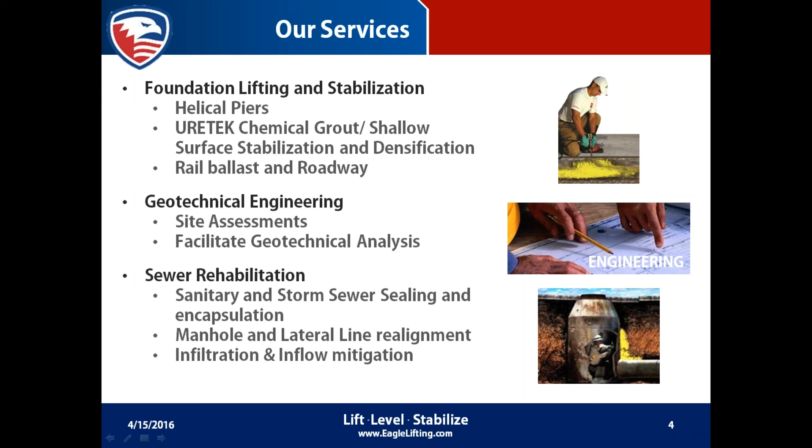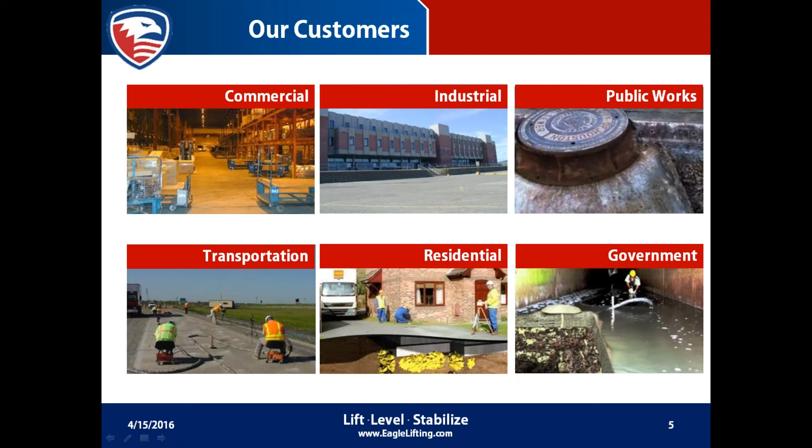The clientele that Eaglelift works with spans various industries, from commercial clients, industrial clients, schools, warehouses, distribution facilities, public works departments, which we'll be focusing on today for our infrastructure, manholes, roadways, highways, transportation, residential clients, and government clients as well. So we have a wide variety of clients.

A little bit about what we're going to talk about is the URETEK deep injection process and the URETEK method. This is a form of compaction grouting that utilizes a structural polyurethane, and what this is used for is specifically what we're talking about here with infrastructure management.

When you have a leaking culvert or a failing manhole or something that's creating roadways and highways to begin settling, which could be from rainwater, cracks in the asphalt, a rise in excavation costs over the past several years has made it almost impractical to both R&R or just pave over. You put a Band-Aid on a broken arm, it's going to fail pretty quickly. So the real repair would be to completely demo everything out and then install brand new concrete or asphalt, especially when you're talking about manholes and culverts.

Now we're not just talking about digging out a section of road. We're talking about digging, excavation, trenching, shoring, pulling all of those spoils out, fixing the problem, which could be the manhole or the culverts, and then importing dirt back in or using an engineered fill, densifying everything, laying new ones. So a lot of downtime. And as time moves on, all of the excavation costs and costs for disposing of spoils are continuing to increase. So what we look at is methodologies to buy more life out of our aged infrastructure.

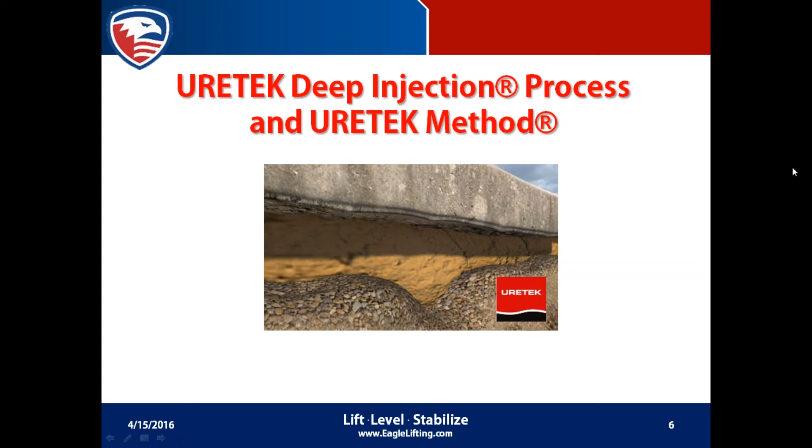Most people are familiar with mud jacking or pressure grouting, which has been around for 80-plus years. Structural polyurethane is sort of the next big thing, the next technological advancement moving forward in the field of compaction grouting.

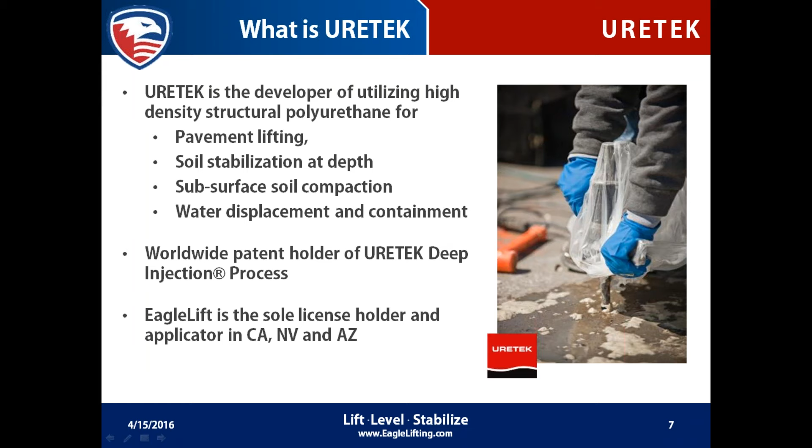So what is URETEK? I said URETEK deep injection and URETEK method. URETEK is a company name. They are the developer of utilizing high-density structural polyurethane for pavement lifting, soil stabilization at depth, subsurface soil compaction, and water displacement and containment. All of these processes utilize the same proprietary multi-component chemical resin, or structural polyurethane. They're a worldwide patent holder of the URETEK deep injection process, which is done for deep soil stabilization and densification. Eaglelift happens to be the sole license holder and applicator in California, Nevada, and Arizona, which is why Eaglelift is often represented as the URETEK Southwest dealer.

The URETEK polymers, or polyurethane, allow for flexible use for lifting, sealing, void filling, and soil compaction operations. Once injected, the polymers expand up to 20 times the initial liquid volume, which means they're injected under very low pressure. If they're being injected at depth through a pipe, oftentimes it's just enough pressure to push the liquid of the isocyanate in the resin through the tubes and into the soil.

As a liquid, it is introduced into the soil and then permeates through the soil or densifies down into the soil, and then the chemical reaction occurs, which expands the polyurethane. Depending on the type of soil, it will either bind the soil together to create a very solid substance, or it will push against the soil, which gives us the densification we're looking for.

The more sandy or silty a soil is, the more polymer it'll take to achieve the goal. However, the more sandy it is, the more it binds the soil together. When you start getting into clays, dense or medium dense clays and so on, that's where it starts pushing against the soil and displacing it.

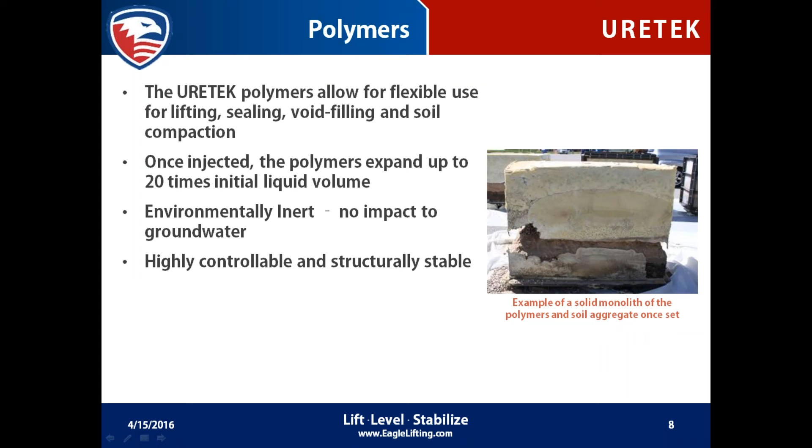It's very possible to create overlift or overseal and cause a lot of damage doing that. So when you plan on utilizing a contractor for void filling and sealing operations, make sure they know what they're doing. In the picture on the right, you can see an example of a solid monolith of polymer and soil aggregate once it's all set in place. They built a plexiglass box, put soil inside, shot the polyurethane, and removed the barrier on the outside - that's what you see afterward. Everything's bound together.

The URETEK deep injection process is a patented 3-step application process. There's a subsurface application into the problem zone via direct injection tubes. This means if the problem is 15 feet down - where you've done dynamic cone penetration testing or standard penetration testing and found super weak layers of soil - one advantage of URETEK is that they can drive injection tubes down to 15 feet and perform an injection at that level. Surface level injections are great - they solve the symptoms of the problem, such as leveling a slab out. But if the problem exists deeper into the soil, you need to solve that problem deeper in the soil, otherwise it'll just come back. That's why we utilize the deep injection process.

Again, it uses the same proprietary 2-part expanding structural geotechnical polymer, and it's constantly monitored using either a laser, zip level, or more conventional levels. Oftentimes with slabs, you'll see a dial gauge being used out there.

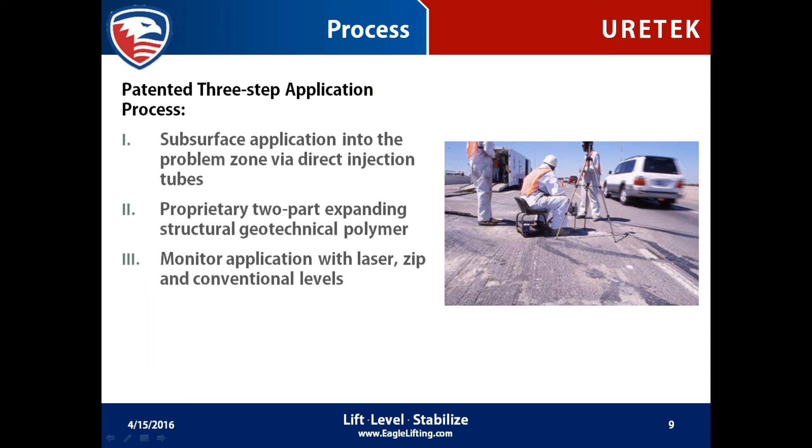The composition of the URETEK polymer is a resin and a hardener. From the iso to the resin, you have a 1-to-1 mixing ratio. It creates an exothermic chemical reaction which generates CO2 gas, and that gas causes the expansion of the material. This creates the lifting pressure or lifting strength. Strength can be up to about 5 tons per square foot, I believe.

It's a very fast reaction time, and it can be adjustable. You can speed up or retard the reaction time based on the temperature of injection or the type of polymer being injected, because it can be a very aggressive polymer designed to create a fast lift, or a non-aggressive polymer designed to permeate further, which is more for sealing and stabilization projects.

Once more, it's environmentally neutral. We actually have our NSF 61, which means the polymers can be injected on, near, in, or around potable water. I don't recommend drinking the stuff - however, it is perfectly safe for you once the reaction's occurred.

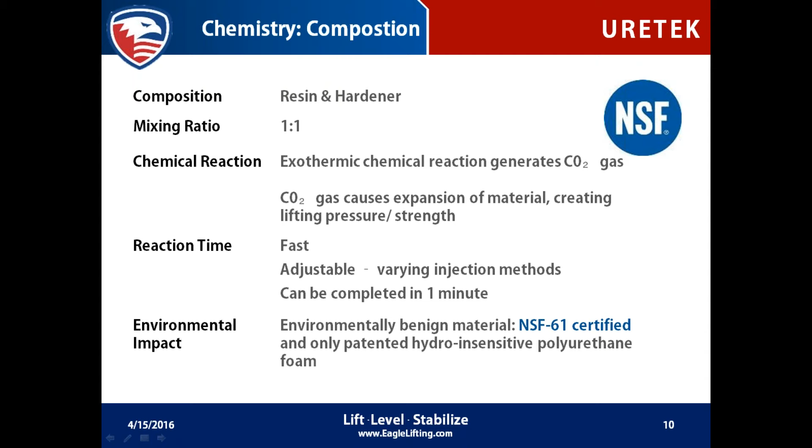It has a rapid cure that can support loads after 15 minutes. As a matter of fact, it reaches about 90% of its total yield compressive strength within those first 15 minutes. After about 24 hours, it's ready for a full load and has reached full strength. This is important because of what I was talking about regarding downtime. If you shut a roadway down to remove and replace a manhole - pull out the old one, put a new one in, densify, pour new concrete, and so on - you've got literally months, or several weeks, of downtime.

Compared to doing a polyurethane project - or really any compaction grouting project, unless you're using a cementitious grout or cement slurry - because the cure happens so fast, when you use a structural polyurethane, by the time the crew finishes packing up and taking off, you're ready to take down your traffic control and reopen the roadways or distribution facilities or whatever you happen to be injecting under. It's one of the major benefits of using structural polyurethane over cementitious grout for compaction grouting operations.

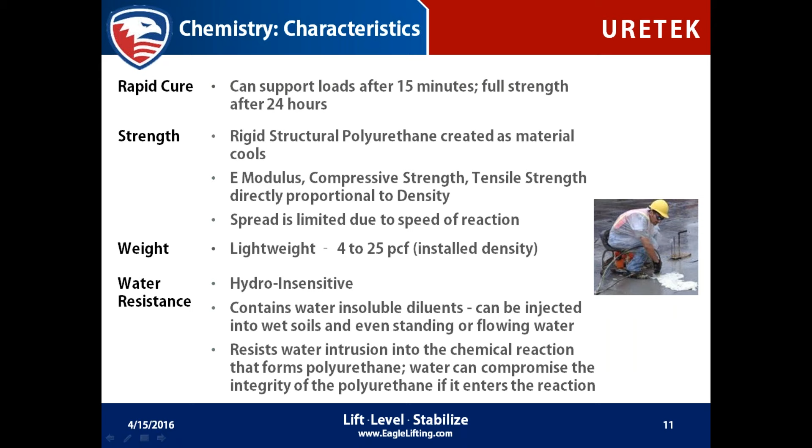Again, it gets very, very strong, and although it gets very strong, it's very lightweight. Cementitious grouting will weigh anywhere between 120 to 145 pounds per cubic foot, versus polyurethane injections, which generally weigh between 4 and 25 pounds per cubic foot - this is the weight of the product after installation. Once more, it's hydro-insensitive, which makes it a very good product for leak sealing and water displacement.

I keep talking about cementitious grouting, cement sand slurries, and things like that because compaction grouting using cementitious grout has been popular for over 80 years. Both have advantages versus disadvantages, but why we lean more toward structural polyurethane is for reasons like application hole sizes. If you use cementitious grout, you're looking at 2.5 inches or more diameter holes, versus URETEK's 5/8 of an inch, which is only about the size of a penny. This is important not only cosmetically but also structurally, because we're not making Swiss cheese out of concrete slabs.

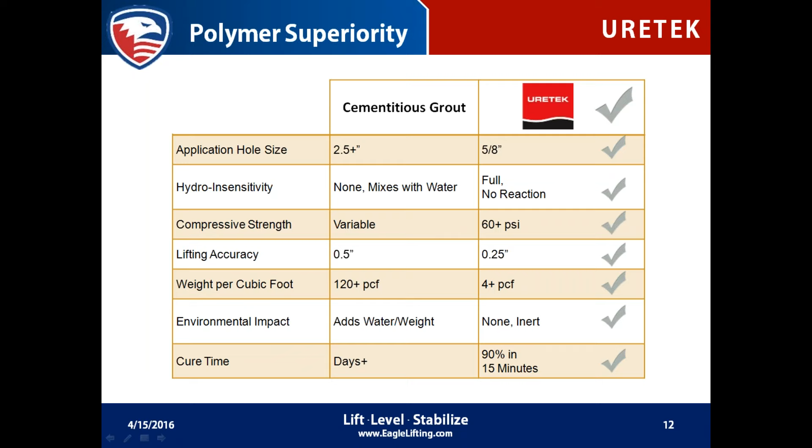Concrete has a tendency to mix with water. Polyurethane pushes it out. Cementitious grout is variable; URETEK oftentimes will hit 60 plus psi. Lifting accuracy for traditional grouting is 1/2 inch, and URETEK is accurate within 1/4 inch. Once again - the weight issue, the environmental issue, and the cure time - time and again it proves structural polymers are the new way we're moving forward into the compaction grouting age.

Once again, the deep injection process is in situ stabilization of soils at depth. When you're thinking about an injection project and what the layout is going to be, we think 4 to 5 foot grid patterns on the XY axis because you've got an 8 to 10 foot diameter sphere of influence, so you get a little overlay.

Now if you take that same grid pattern and put it on a Z axis, you've got a little bit of overlap on that same 4 to 5 foot grid pattern, but you're creating essentially very strong, stable columns of soil beneath whatever is on the top level. This could be buildings, freeways, bridge approaches, even manholes. By creating that strong, stable column, you're supporting whatever happens to be on top and extending the life of that infrastructure with zero excavation.

When you do these multiple depth injections, you start with the lower strata to help anchor the upper strata, which increases the densification potential. The polymers get stronger the more confining pressure you have, so you start by creating a strong base and then inject in the middle to get better densification and increased potential for lift.

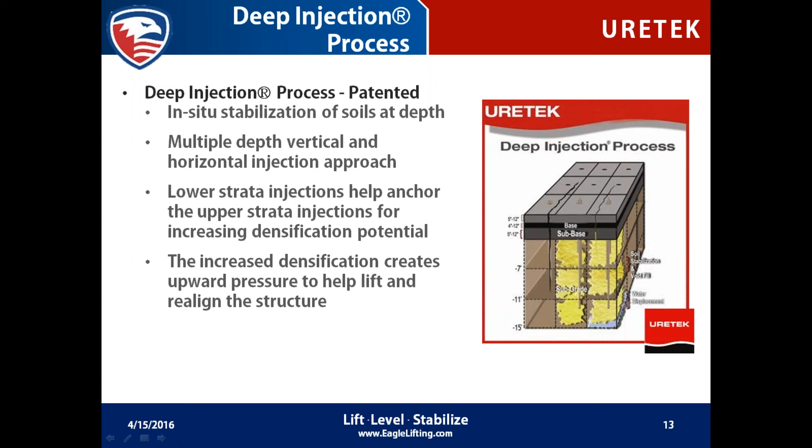The method itself is directly under slab injections. This is used to stabilize the structure utilizing the same horizontal XY axis patterns, but the primary use is for void filling, slab lifting, and undersealing. Again, this is at the surface level, not injected at depth.

The gridded patterns help ensure the material addresses the affected area, with consistent material distribution and highly improved weight-bearing capacity. What we mean is if you have a section of roadway, or rocking slabs inside a warehouse where every time a forklift drives over it rocks and begins to crack and fail, by restoring the connection of the soil to the underside of that slab, the distribution is more even across the slab, which improves the weight-bearing capacity throughout.

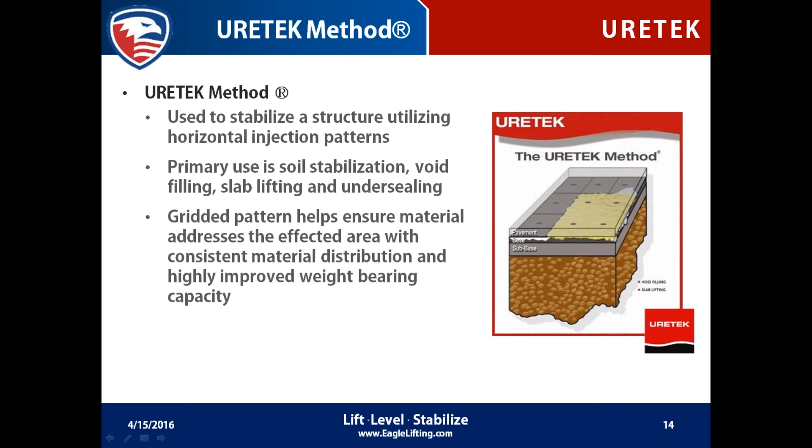So once again, we are buying more life out of the infrastructure that exists, and once again, it's without excavation. A primary example you can see on the right-hand side here, the before picture, where you can see all the faulted joints. There are a lot of different things that cause this, but it's one very common sign of settlement.

In the diagram on the left-hand side, polymers are injected at depth to strengthen the affected area of the soil, and then also injected directly through the concrete at the joints. This fills the voids you can see in the top diagram with a structural polyurethane of 60+ psi, shown in the bottom diagram. By bridging that connection, you're restoring the strength of the slab and re-leveling it, which you can see in the after picture on the right-hand side.

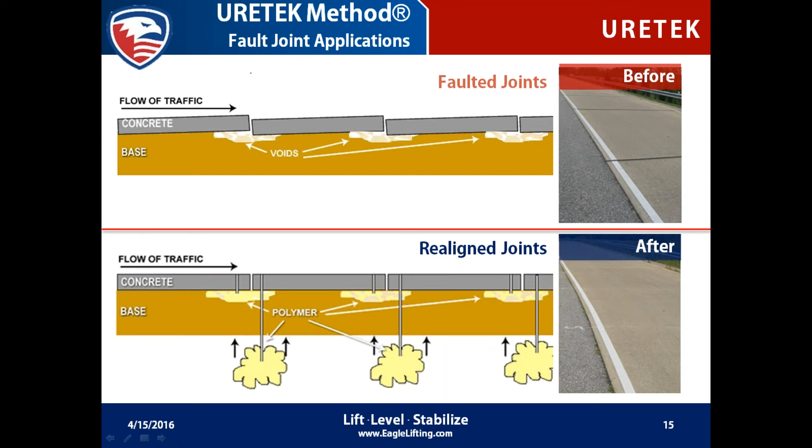So if you use your imagination a little: 5/8 inch holes at each of the faulted joints, for 4, 5, 6, 7 of these joints you see in the pictures, it's only a few hours of work being performed here, versus ripping and repouring, with all the costs and potential downtime for whatever roadway or highway it happens to be.

I like this one more for the before and after, which you can see from the pictures. You've got a roller coaster of a roadway in that before picture. From the diagram with the base dip, you can see it's almost the same thing as that faulted joint. You've got voids underneath the roadway, which decreases its ability to support weight, creating that dip. So you do the same injections at depth, and you could do under-street injections, although it's tough on pliable surfaces like asphalt, and create a lift. In the after pictures, everything is completely straight, running through and through. It's another clear-cut case of compaction grouting operations giving you zero excavation, otherwise known as the trenchless revolution.

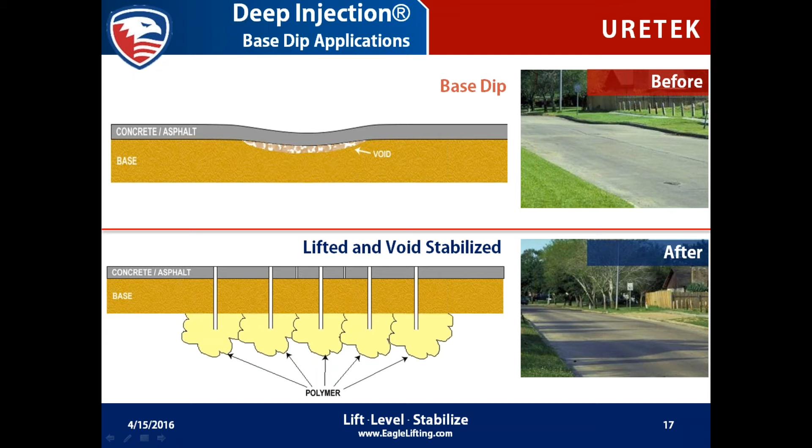It was a test, an experiment where we used GPR on a freeway, and the polymers did not show up on the GPR, just kind of shot straight through them. GPR being ground penetrating radar. So what we wound up having to do for the test is this exact concept we're looking at here: perform deeper injections in order to push the soil up, and then it would register with the GPR that those voids had been filled with a product or substance.

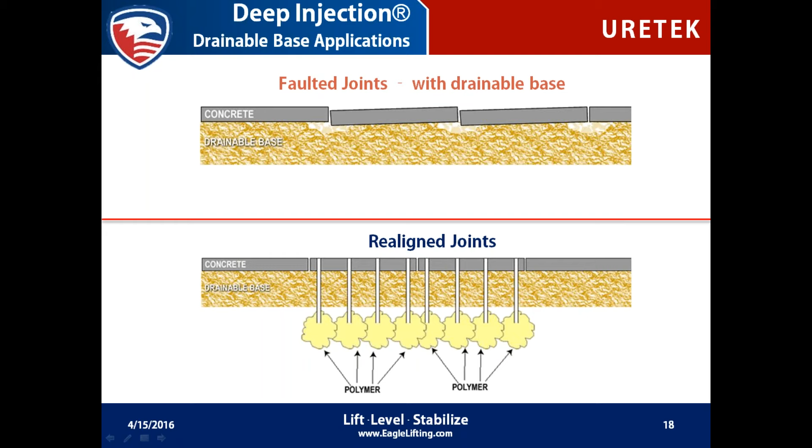There's a very, very high, very diverse application of compaction grouting technologies. So I wanted to go over a couple of different case studies, projects that have been done with the structural polyurethane, to see not just 'we did this and it was great,' but also the various different applications for infrastructure repair and rehabilitation.

In January of 2013, URETEK Holdings performed 290 lineal feet of an in-situ grout wall. They injected URETEK's 486 Star geopolymer for the Florida Department of Transportation. It was a hydro-insensitive two-part polymer that was injected in a highly controlled manner through 5/8-inch holes and 1/2-inch diameter steel injection rods. After hydro-lancing, or water jetting, to clear utilities to 5 feet below the land surface, the injection rods were installed at 5 discrete elevations in a 3-foot horizontal and vertical grid pattern. The material was then injected through each rod, expanding to at least 15 times its liquid volume, forming a sort of sphere at each location. They performed 490 injections total at 98 points along 290 lineal feet of the SR5, or US1.

This created a hydraulic barrier that restricted groundwater movement from a contaminated site to a construction site where drainage features were being installed by FDOT. This removed delays to the project, as construction dewatering would have been impacted by the contamination. So the Florida DOT team received a Prudential Davis Productivity Award for this project for utilizing an innovative process to minimize contaminated impacts to their construction site.

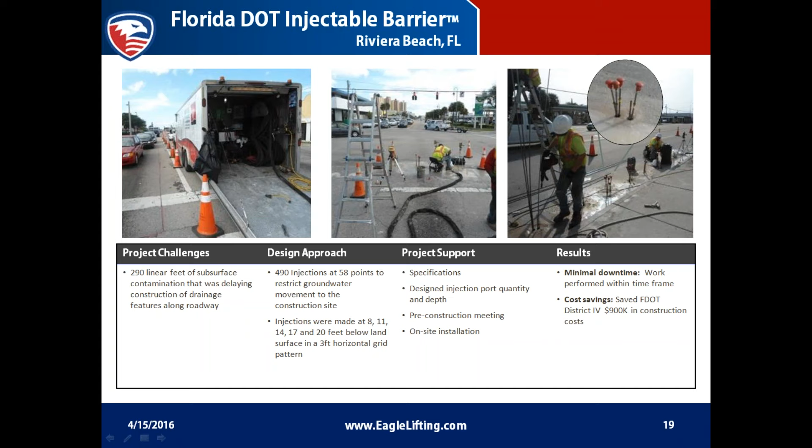They stopped the high pressure leaks in minutes and significantly reduced flow through the sanitary system, saving the city over $90,000 per month - and I'm just going to throw that out there again: they saved the city over $90,000 per month by sealing these manholes. Since the repair, 49 pump hours per week has been reduced down to 17, with cost savings of $100,000 per month since the repair. This is still going on, and I believe they have a great case study built on this project, with even a couple of references they were able to pull out of it.

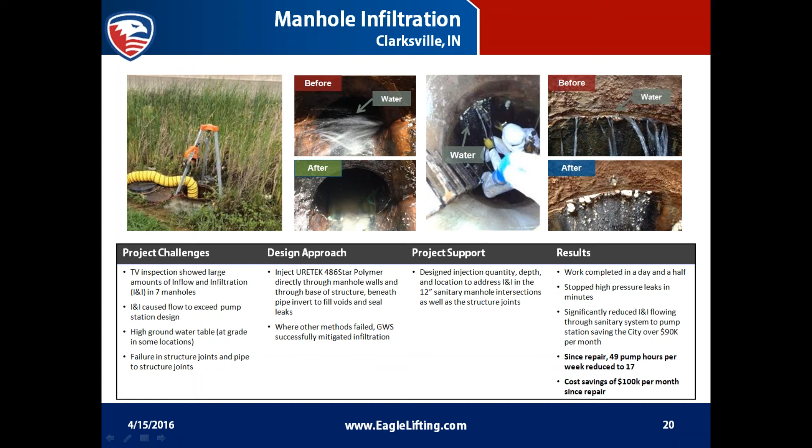Transportation services - we've been talking a lot about roadways, manholes, different things like that. The services would be slab leveling and stabilization, soil stabilization and void fill, mitigating groundwater migration, and infrastructure rehabilitation.

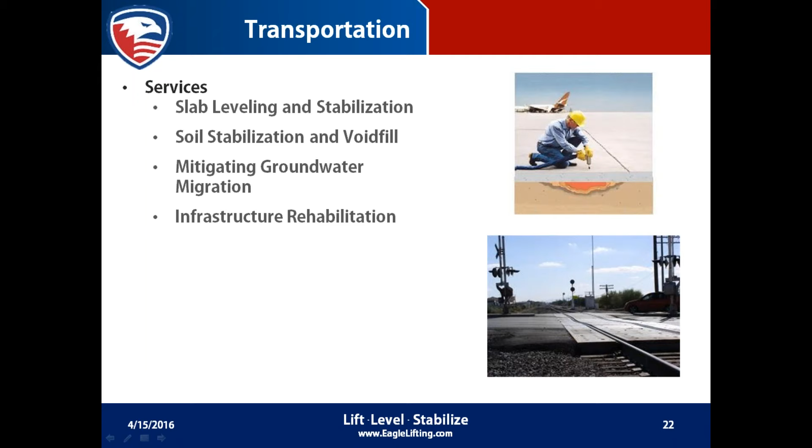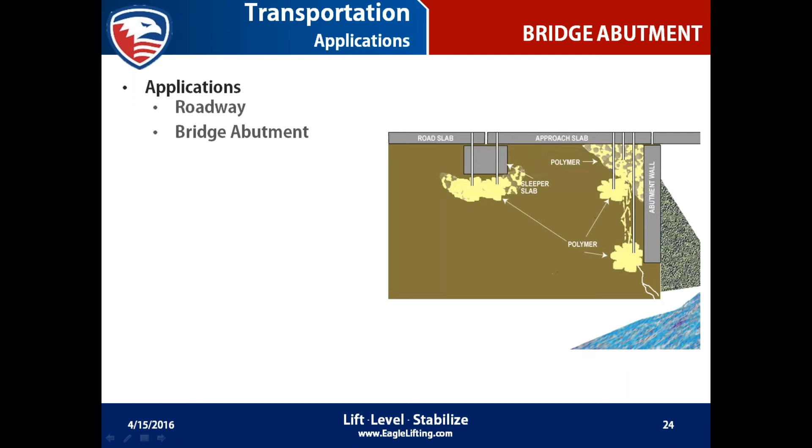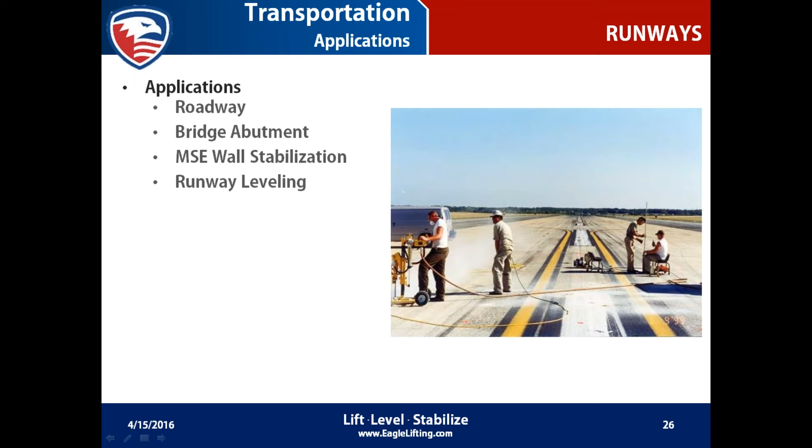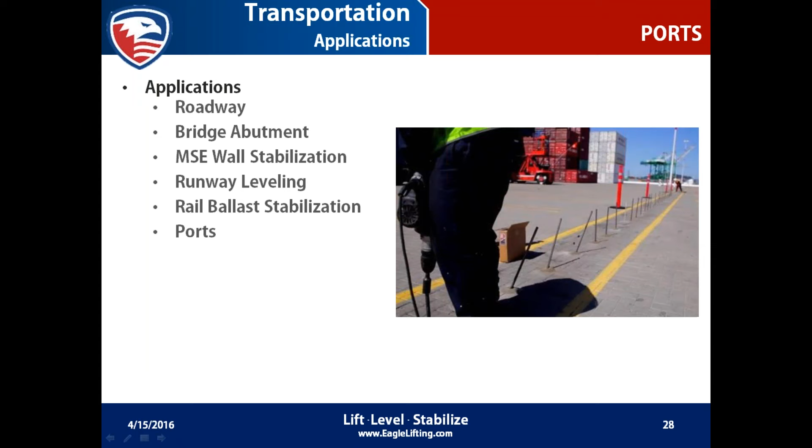There are various different applications for the transportation department, which includes roadways, bridge abutments, MSE wall stabilization, runway leveling, rail ballast stabilization, ports, bulkhead and seawall repair, and sewer rehabilitation.

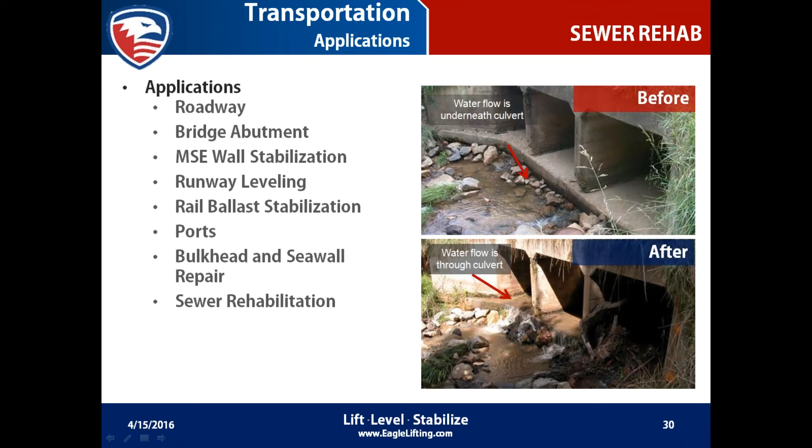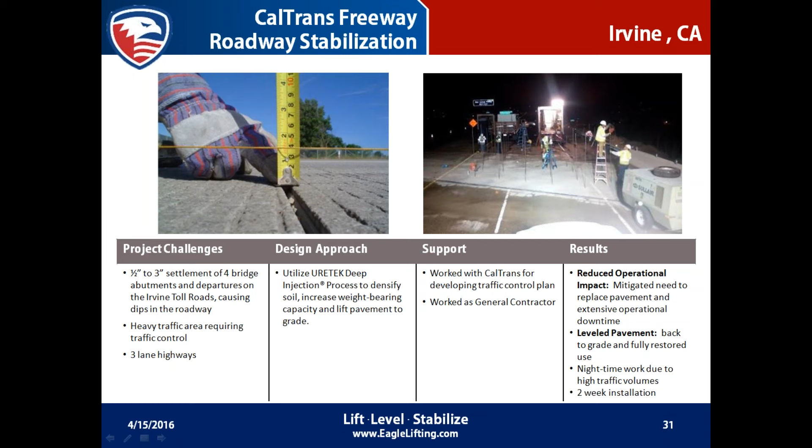They were able to save the client over half the cost of ripping and repouring. Doing this project cost literally 50% less than ripping and repouring all of those sections.

Over the years of heavy use, the pavement, subbase, and base beneath the gantry crane wheel path in the Port of Oakland had begun to subside. The subsidence is very common in situations like this, where cyclic loading and heavy loading conditions, especially when the loads have increased over years, impacts the base and subbase with high water tables, especially in the ports.

The differential settlement not only made it difficult for operators to align their cargo properly, but also created safety hazards while the cranes traveled along the site. The settlement ranged anywhere from 1/2 inch up to 4 inches at the worst cases.

Prior to any injections taking place, some DCP tests, or dynamic cone penetration tests, measured the relative soil density, which indicated that the subbase needed to be densified at least 2.5 foot depth. The URETEK process was then utilized to densify the soils and then lift the pavement to grade.

The 2-part polymers injected through 1/2 inch tubes, once again at a 5-foot grid pattern, which you can actually kind of see on the far right picture, directly underneath the wheel path for the gantry cranes. The resulting mixture polymerized beneath the slab, creating minimal heat with optimum expansion.

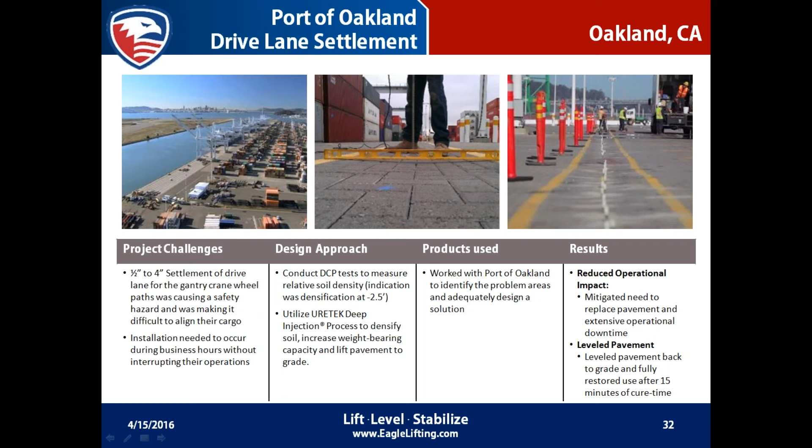With the expansion, the material aggressively sought out the voids while densifying the surrounding soils and lifted the pavement back to its original elevation.

The project was done for B&P in Baltimore for Amtrak. Soft soils underneath the track were completely saturated with water, and as trains passed by, that water would literally pump onto the tracks, which you can see in that center picture. The far left picture is a pretty good indicator of water as it stood at the bottom of the tracks as well.

The result was that the rail had settled up to 1.5 inches. With limited work hours, each location had a very, very tight project window.

We were able to inject the URETEK polyurethane from the surface to dewater and stabilize the soils, and then lift the rail back to grade. The injection ports were at various locations and depths.

Working with Amtrak, we were able to get minimal downtime because all of the work was performed within that small window we were discussing, to keep the downtime of the trains that passed through that area down to almost 0.

The rail was lifted a full 1.5 inches up to grade, and as I was mentioning with the freeways earlier, when you're injecting, you can actually watch the water being pumped out while the injections are occurring. So during the injections here, you were able to see the water being pushed out, and since then, Amtrak has not experienced a problem of water infiltration or settlement in this area.

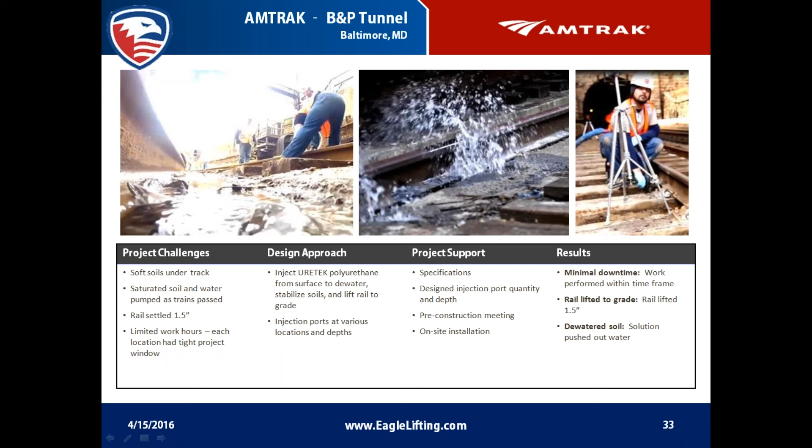Jackson Lakes had a box culvert in Pensacola, Florida. Intense rainfall and historic flooding occurred on April 29th, 2014. Due to that, J.L. Halstead conducted a preliminary damage assessment on June 14th. The National Weather Service reported 20 inches of rain over a 2-day period. The embankment failure of South Pond allowed Jackson Creek to flow under culverts, causing significant undermining and soil displacement from beneath the culvert.

URETEK performed on-site testing and identified an average of a 2-foot void. That's not 2 feet down into the soil - it's a 2-foot void and settlement of plus or minus 2 feet across the southwest portion of the culverts. They injected over 38,500 pounds in a surgical injection designed to lift, underseal, void fill, and restore structural stability to 1,675 square feet of a quadruple barrel culvert.

24 inches of lift was achieved on a 4-foot grid pattern of injections through the base of the culverts. Then the method, instead of deep injection, was used to underseal and ensure all those voids were filled. In a quote from J.L. Halstead: 'The local market recently has been exposed to a geopolymer soil stabilization and lifting technology. The technology is said to provide a means of structural lifting, foundation subsidence correction, and void filling. It would be prudent to explore this technology as a possible alternative to complete replacement of the concrete culvert.'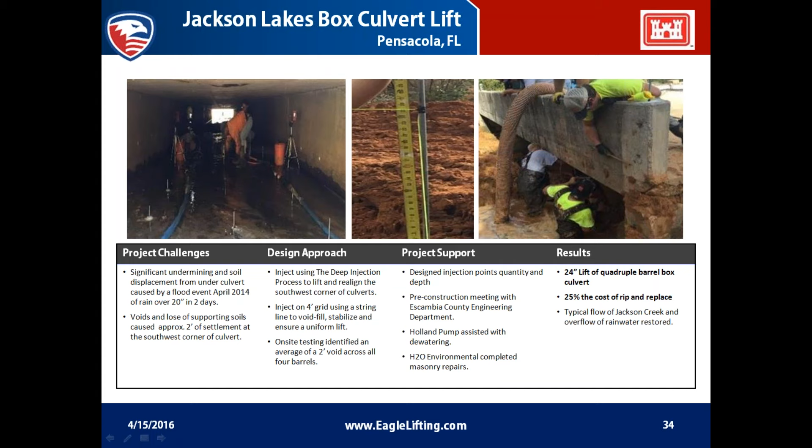So we'll actually drop people using an A-frame, with confined space entry training and whatnot, into the manhole in order to perform lateral injections. On these lateral lines that need to be protected so we don't plug them with polymer, oftentimes they'll put a rubber bladder on the inside to prevent polymer infiltration into those lateral lines. They'll seal around the pipes first, seal around the manhole itself as well. Then, provided the manhole is in condition to be lifted, more injections are performed at the bottom of the manhole to create an upward pressure and lift the manholes back to level.

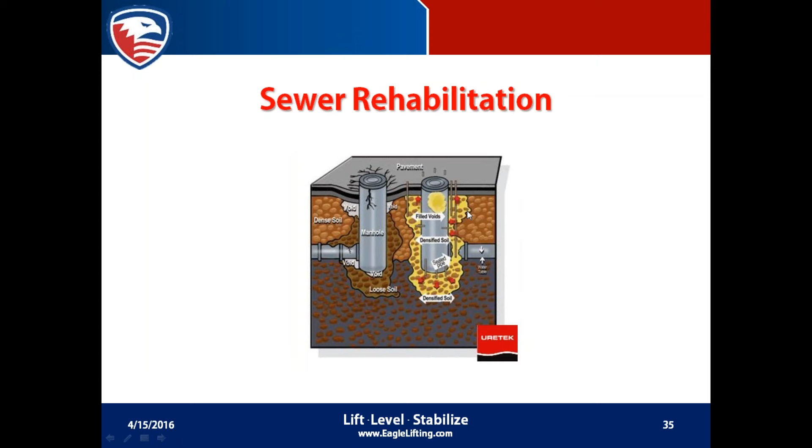Sewer infrastructure rehabilitation is another application of the URETEK product. It's the encapsulation and sealing of lateral lines in manholes utilizing the URETEK deep injection and method applications. Again, it is a trenchless application that can be applied from the surface or from within the pipe if over 36 inches in diameter. So what we're talking about is sealing all of the lateral lines, lifting to level, rehabilitating and refurbishing this entire manhole, and buying years and years of life out of it for a fraction of the cost of having to cut out the concrete, dig all the way down to the bottom, replace your manhole, re-put the engineered fill back in, proper compaction, and then laying concrete over the top.

A popular problem we've been seeing in local municipalities lately is that anytime you have an underground utility trench or lateral sewer line, they put the dirt or engineered fill back in, and because they're afraid of damaging the utilities or the lateral lines, they never achieve proper compaction. One of the big things we've been able to do is come in and perform deep injections at the depth of the utility trenches or the lateral lines in order to seal and stabilize all of the soil and realign the roadways. This is a very popular problem lately, and you do that without shutting down the roadways, which is why it's so critically important. Because the polymer will travel and densify through the path of least resistance, we never worry about injecting around concrete because it will most likely seal the concrete first and then push against or bind with the surrounding soil.

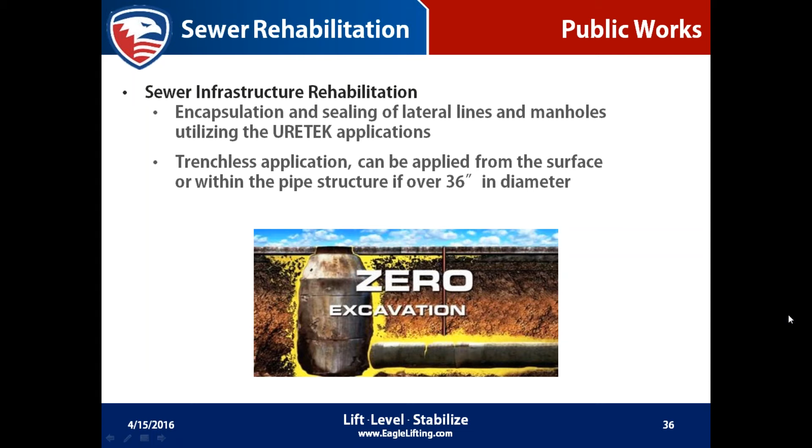It's a picture of an application for soil stabilization and void fill. It's a brick manhole, which you're looking down from the top. The structural realignment or stabilization, sealing or encapsulation of the sewer against infiltration and inflow, otherwise known as I&I, as well as preventative maintenance. For structures, it happens to be outfalls and dams, manholes, lateral lines and culverts, or lift stations. It is very often that during a void filling operation you see polymer infiltration inside what you're injecting into. Another difference between polymer and cementitious grouting is that for this stuff, you just give it 20 or 30 seconds to solidify, and then you can break it off by hand. Very simple, clean cleanup process.

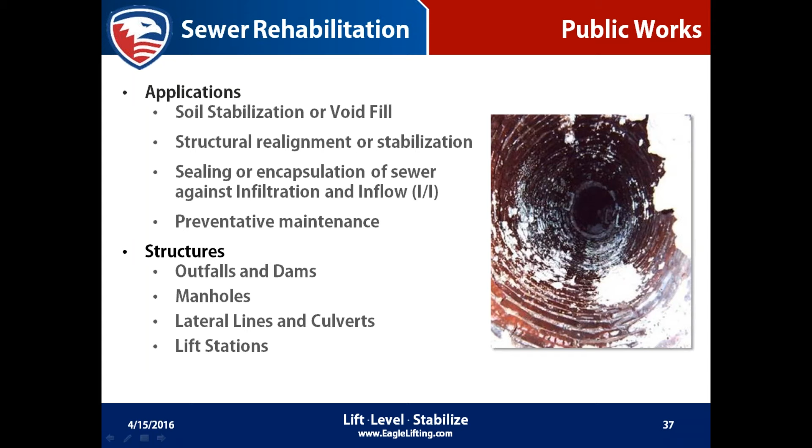Case in point was a manhole B8 brick stabilization in Knoxville, Tennessee. Lateral pipe had sheared and extensive voids and loose soil was around the manhole. We filled it at 25 feet below grade, sealed and stabilized around the manhole. It's a great representation of how the polymers aggressively seek out and permeate through any existing voids.

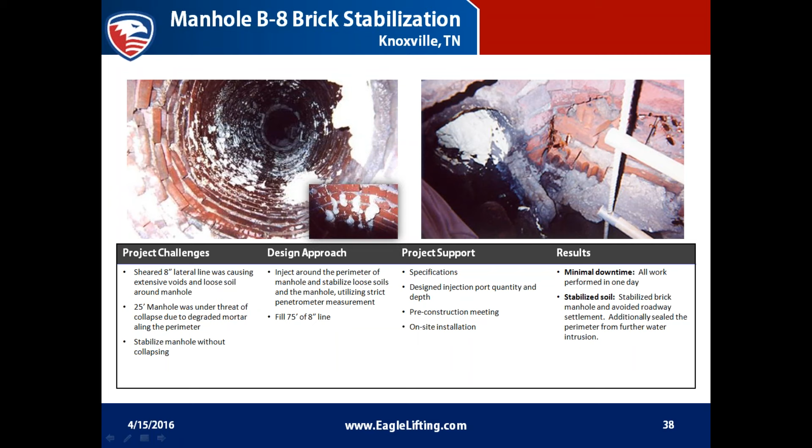Operations were being done up by URETEK Southwest, where a contracting company was installing a large diameter culvert along an industrial street approximately 25 feet below grade. During their excavations, they hit pocket voids, which caused a collapse of the soil and got their excavator stuck underground 25 feet. So some testing was done at the surface, and they found where all of the loose soil and pocket voids were located.

URETEK was able to come in and perform multiple injections in order to densify and lock all of the soil into place. After they were done, the company was able to back the excavator out, move it forward again, and drill straight through the polymer and the soil. So the polymer didn't get so strong that their excavator couldn't break through it. It was kind of a win-win-win-win situation for all of the companies involved.

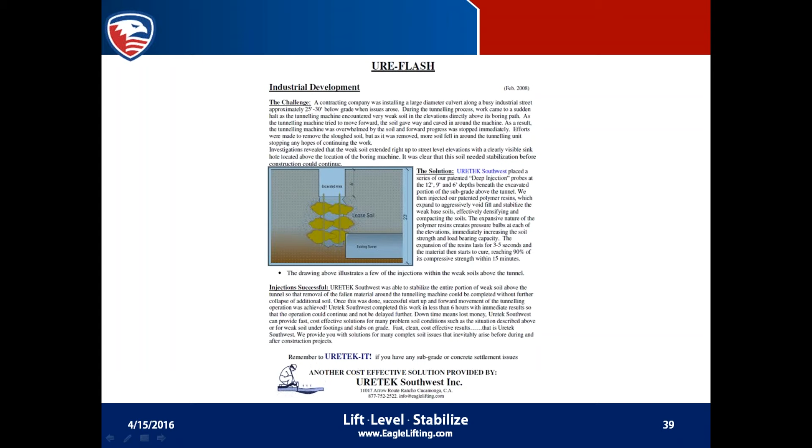In Hayward, California, we did pipe joint sealing, and this is probably a phenomenal example of culvert manhole stabilization without having to trench. You can see on the far left, there was 140 lineal feet of 30-inch storm drains leaking at 90% of the joints, which resulted in subsidence of the roadway, sidewalk, and all the way through the residential district that the storm drain was running underneath.

The pipe ran through 3 different residential properties. If you could wrap your head around the scope of needing to tear up somebody's driveway, their lawn, their sidewalk, they would not be able to park at their house, plus the safety hazards that would exist if they continued to live there. We even had one particularly difficult client who was complaining about needing to be relocated, and somebody would have to pay for that because they didn't feel safe given the health and safety implications of all this work going on in front of their house.

So instead of digging everything up, a GPR scan was performed to locate the vertical and horizontal alignments of the pipe, and then deep injection was performed at depth in order to seal, densify, and lift the pipe back to level. Each joint was successfully sealed as polymer infiltrated the entire length of each joint.

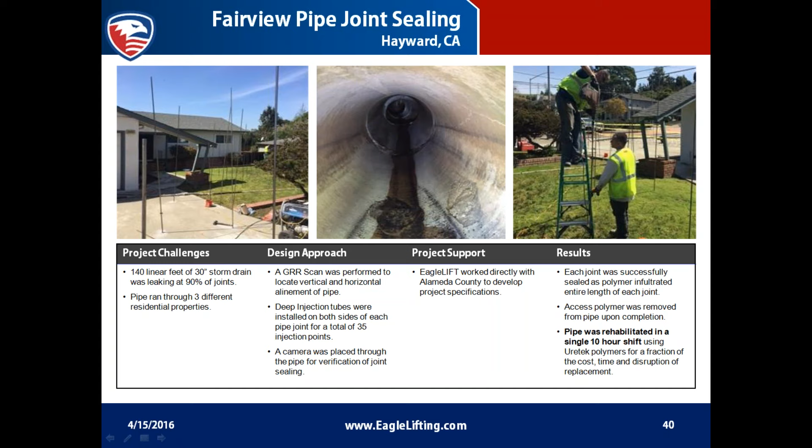Once again, Eaglelift does provide some engineering services. This is a review of soils reports, just sort of making a meeting of the minds. We're familiar with many different types of processes, but some of the things we like to bring to the table is trenchless technology, and applications where maybe compaction grouting is necessary or better than polyurethane, or more often than not, we recommend structural polyurethanes for deep soil stabilization.

As a general engineering contractor, we do work with an esteemed network of engineers. We have an array of different engineering services such as dynamic cone penetrometer or DCP testing. We perform soils testing or test piers if you plan on doing a steel underpinning type project for foundation retrofits or helical installations for pre-constructions.

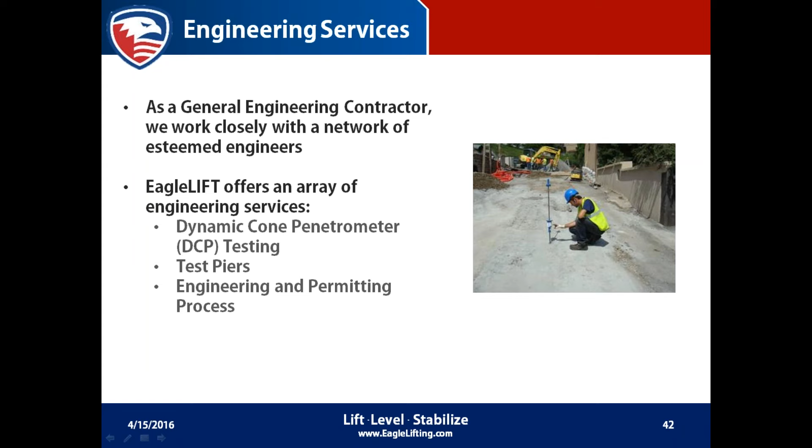We also handle a lot of the engineering and permitting processes for code compliance and coordination. We've got a long history of successful engineering and permitting, which I'm sure all of you engineers know - working with municipalities is not always the easiest thing.